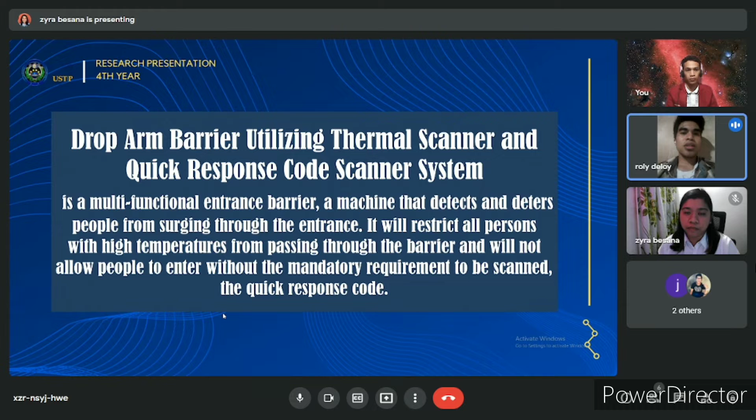Innovating and applying technologies to help improve the current situation we are facing right now means so much. According to Nick Simon, turnstiles improve security and integrate easily with facilities access control and visitor management systems. With multiple types, features, and options, turnstiles easily meet requirements and enhance the security of today's modern business facilities.

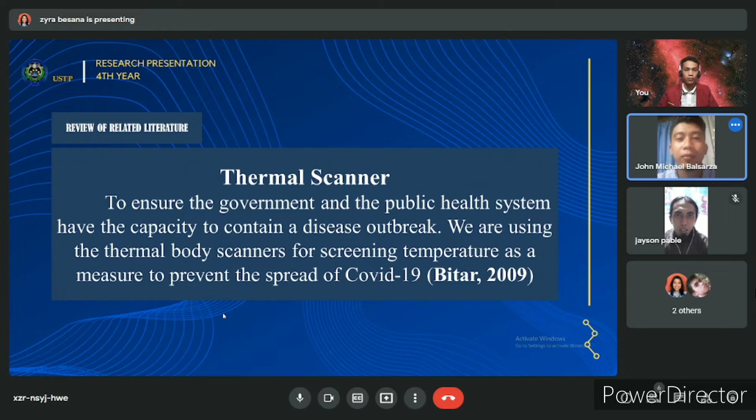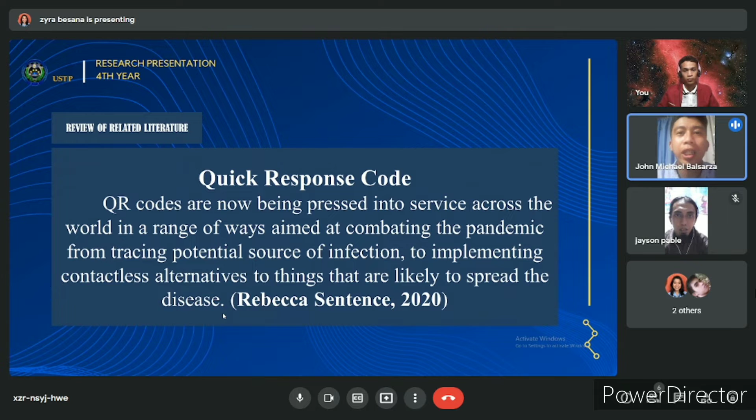According to Bitar, to ensure the government and the public health system have the capacity to contain a disease outbreak, we are using thermal body scanners for screening temperature as a measure to prevent the spread of COVID-19. According to Rebecca Sentence, QR code scanning is now pressed into service across the world in a range of ways aimed at combating the pandemic, from tracing potential sources of infection to implementing contactless alternatives to things that are likely to spread the disease.

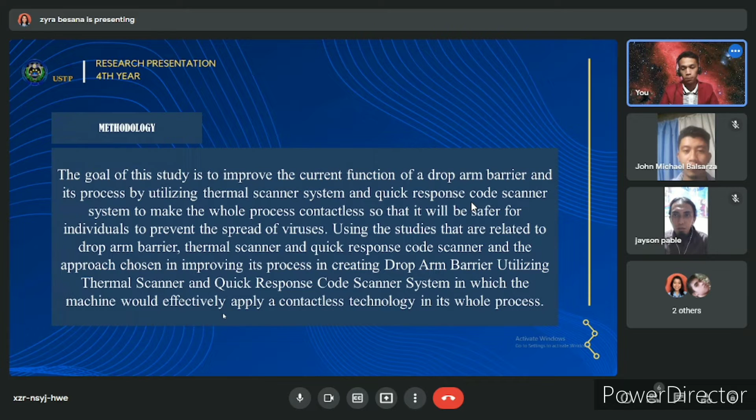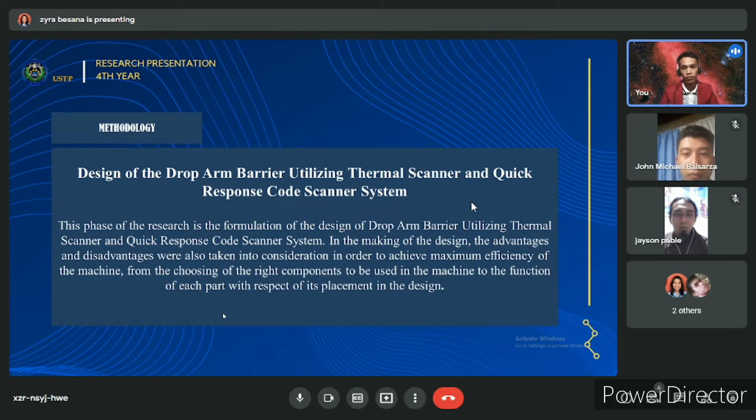The goal of this study is to apply a contactless process upon entry using the drop arm barrier utilizing thermal scanner and quick response code scanner system, in which the spread of viruses will be prevented by using this machine. In the making of the design, the advantages and disadvantages were also taken into consideration in order to achieve maximum efficiency of the machine, from choosing the right components to be used in the machine to the function of each part with respect to its placement in the design.

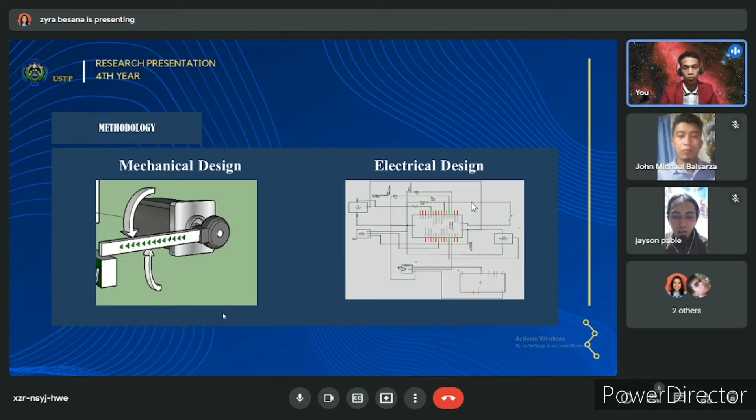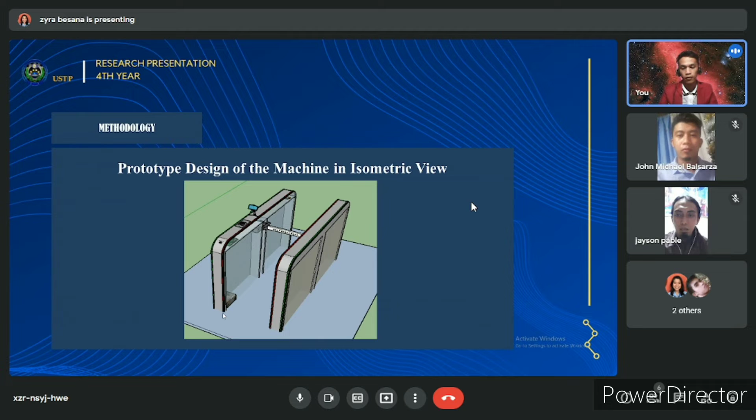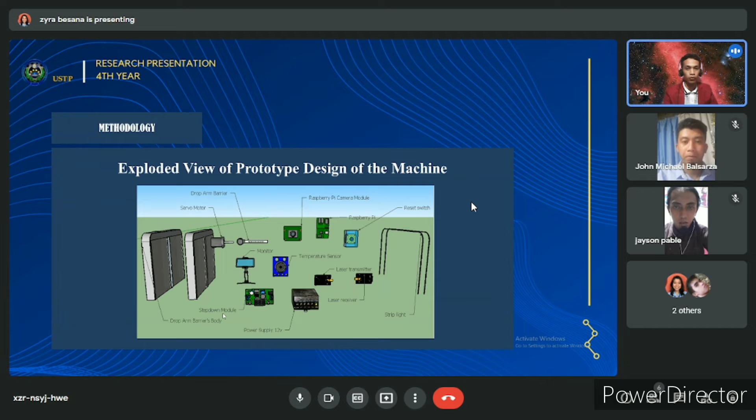So, first we have the power supply, which serves as the main power source of our system, and the Raspberry Pi will act as the brain of the system, where the components are programmed based on their desired function. The Raspberry Pi camera module will be the QR code scanner, the temperature sensor will be the thermal scanner, the push button switch will be the reset button, and the monitor will display the temperature of the person being scanned, and the servo motor will drive the drop arm barrier. And lastly, the laser receiver and transmitter will send a signal to the servo motor to go back to its original position.

This research presents the development of a drop arm barrier utilizing thermal scanner and quick response code scanner system. And here are the steps. First step in the development is preparing the components to use in the machine, testing their effectiveness and calibrating those components that need to be calibrated. Second is programming the Raspberry Pi based on the desired function for each component. Third is fabrication of the drop arm barrier's body based on the final prototype design. And fourth is assembling all the components in the fabricated body of the drop arm barrier in their designated locations.

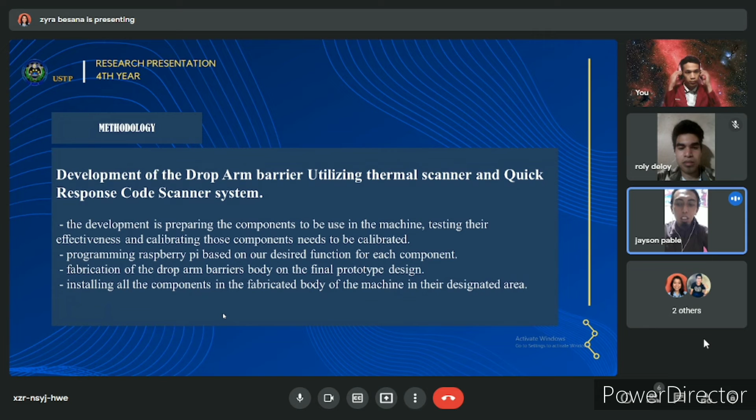Implementing the drop arm barrier utilizing thermal scanner and quick response code scanner, it needs to be in the desired area of deployment, which would be indoor establishment entrances, and the goal of our research is to implement a non-contact entrance. And these are the components to be discussed on how they work in our system. First, the person must scan their specific QR code, and after scanning their specific QR code, which is the Higala quick response code, he or she can proceed to the thermal scanner. This is a non-contact thermometer.

If one of the two components is failed to comply by the person, the red light will light up, and the authorized personnel are allowed to push the reset button of the system, which is placed on the left side of the body frame. And if the green LED lights up, it means all good. The person can continue the process. The temperature and the information are visible because there is a small monitor on the top of the body frame of the barrier. All of the programs are commanded by the Raspberry Pi, and the Raspberry Pi will give the information to the servo motor to drop the arm to let the person pass through it.

There is also a transmitter and receiver sensor after passing the drop arm barrier for a specific function: to command the servo to return to its original position. Passing through it results in the absence of light at the receiver, then the cycle of our system will reset.

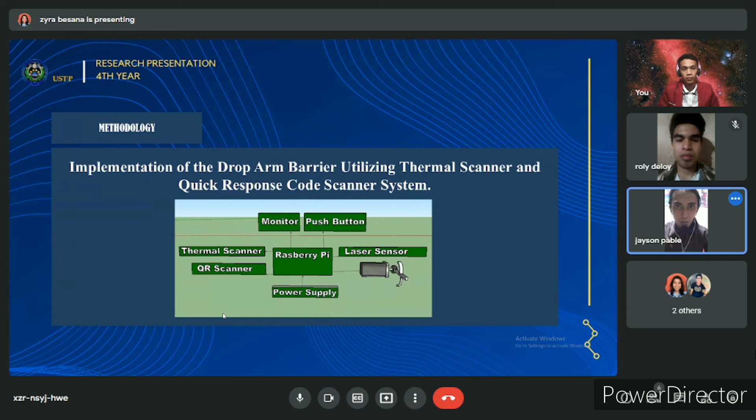And next is evaluation. In evaluation, data could be gathered by conducting surveys and interviews for users' insights and opinions based on the performance, acceptability, and benefit of the prototype for the users. Possibly the advantages and disadvantages of this prototype compared to the existing drop arm barriers in the market. Also evaluating if the goal of the study was achieved. This is the end of our presentation.